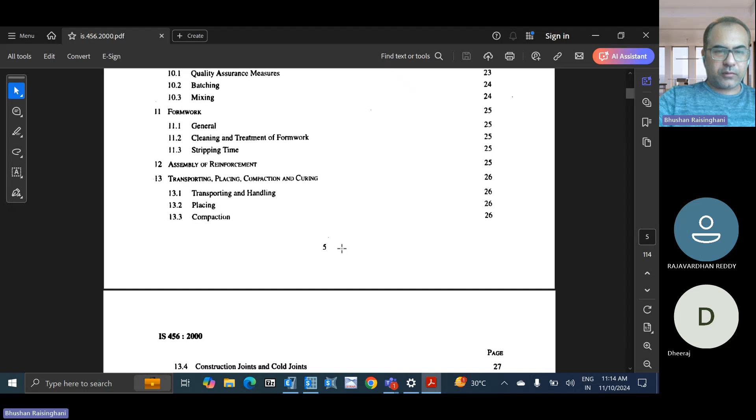Section 24 is for the solid slab, continuous over the support, monolithic, which supports slab spanning in two directions at right angles, and loads on the supporting beams. This is an important section that we have seen.

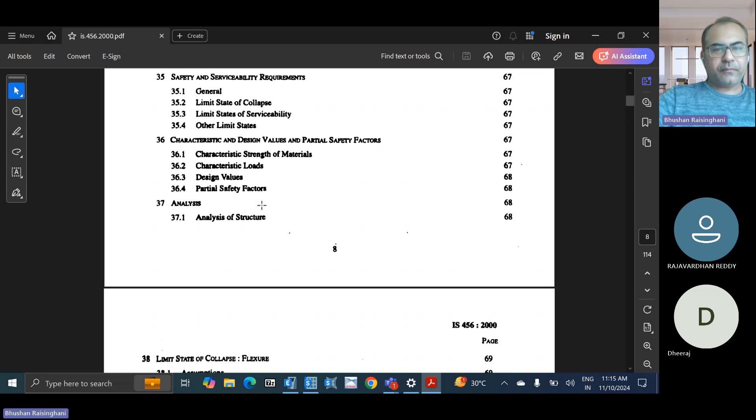I don't think people have queries in the limit state method of design that discusses collapse, serviceability and durability. Three parts are there, and the local checks of cracking, then temperature. So all that reinforcement has to be provided, the cover has to be provided. All those partial safety factors, design values, characteristic loads that we consider for analysis and design remain the same in this particular case.

The only thing is we are comparing the results of the software with the code formulas. So the code uses empirical formulas, whereas the software is using an FEM based routine.

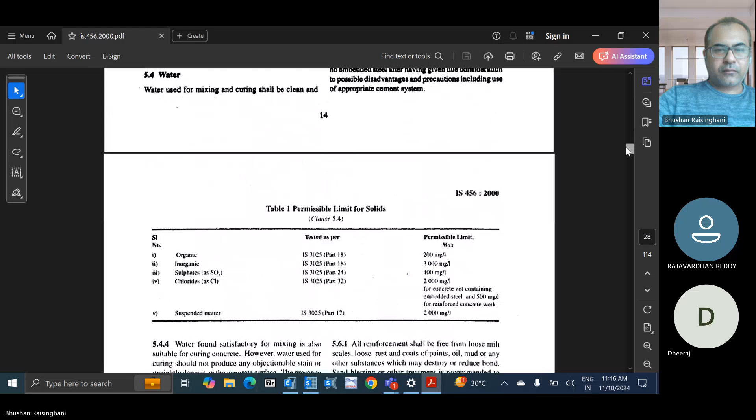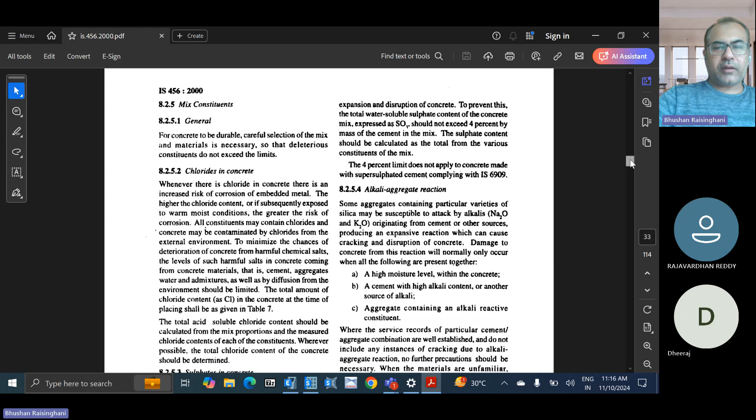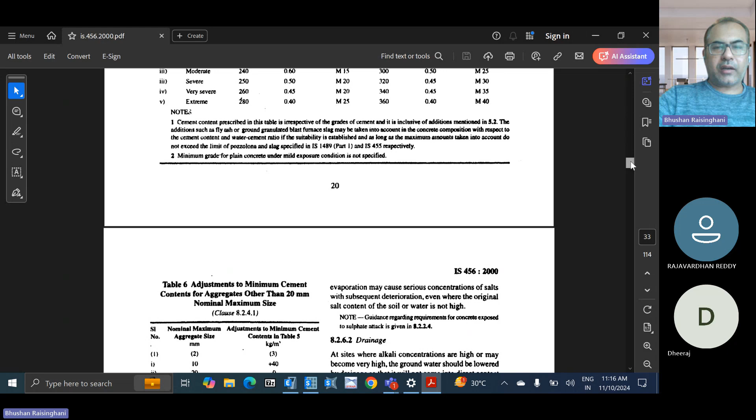So the first thing that we do for any element design as per the IS code is we calculate the effective length. Now for a continuous slab having, let's say, 4 or 5 spans, the effective length in X and Y direction can be calculated center to center of the support, or clear span plus effective depth on both sides. Whichever is less, you take that as the effective length, in both directions you calculate it, so LX and LY, if it is a two-way slab.

If it is a one-way slab, then you have to consider only one direction. The bending is always in the shorter direction, so you consider the shorter direction for the bending moment. Higher bending moment will be there, so the bottom reinforcement will be higher, and it will be at the lower position in that particular direction while detailing it.

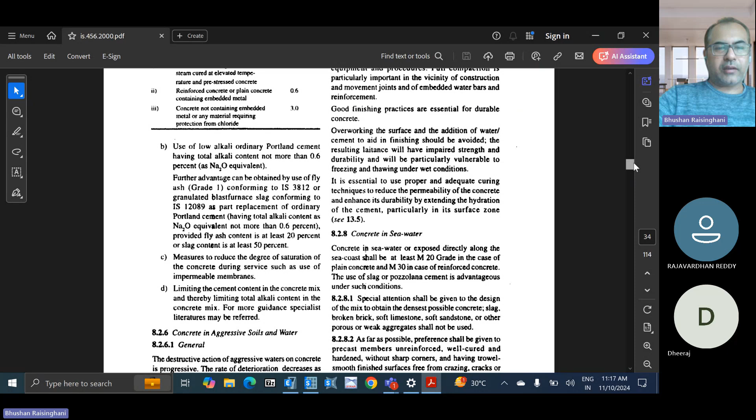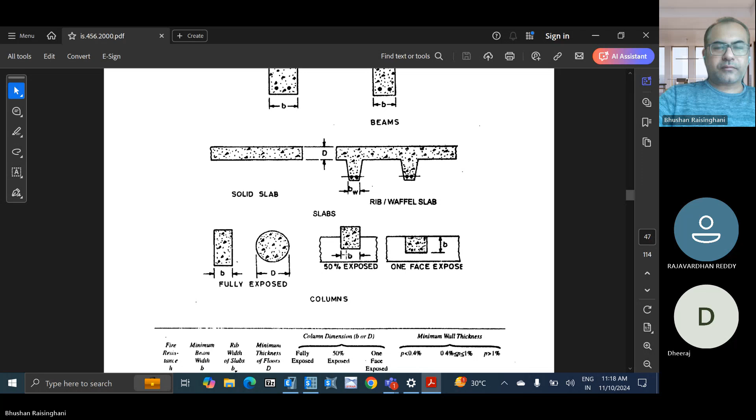So this classification is for rib slabs, these are the ribbed ones or the waffle slab, and this is the solid slab. Two types of arrangements are there, and you can see the same in the software also. One is the waffle or rib slab, and the solid slab. Software is also giving two options for design.

Now this is important, table number 12 and table number 13 if we are designing as per the IS code. I can annotate, and if you are able to see, let me know. Are you able to see the red line?

No. Now can you see? Yes. Okay, let me redraw. So now you are able to see the red line I have drawn. Okay.

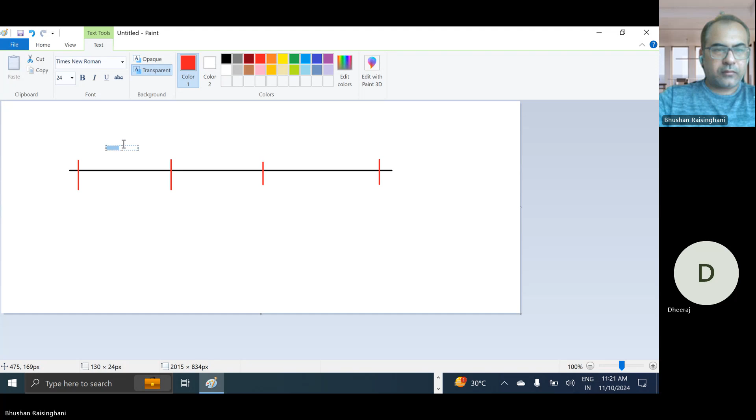So I'm drawing a continuous span of the slabs. This is a three span, let's say two-way slab or a one-way slab, whatever the case may be, and its length maybe 5 meters, then 6 meters, and this may be 7 meters. Dead load and live load is applied here - dead load plus live load. This is a gravity case we are considering right now. So the total load that will come here would be self weight of the slab and the floor finish. So dead load will come as self weight of the slab plus the floor finish.

Just hold on, some noise is coming in back.

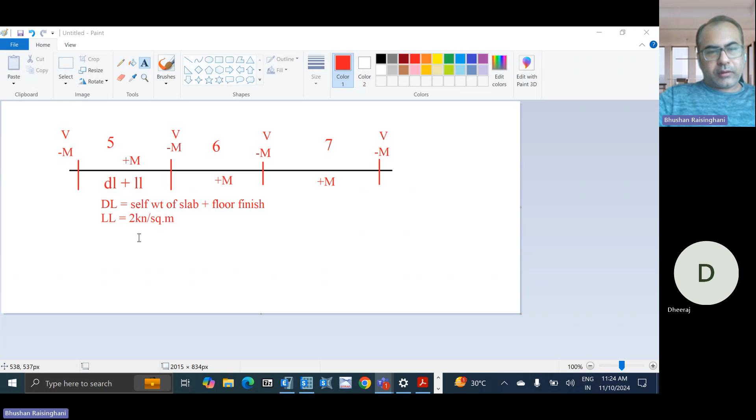Now, if we are calculating the bending moment, we require WU, that is with factor of safety 1.5 times dead load plus live load if we are doing the gravity case. So this is how we calculate WU. From that we calculate the ultimate moment, which is the factor - it may be alpha X or alpha Y based on the code - into 456 into WU, WU in the sense in kilonewton per meter square, that's why I'm writing like small wu, and L effective the whole square.

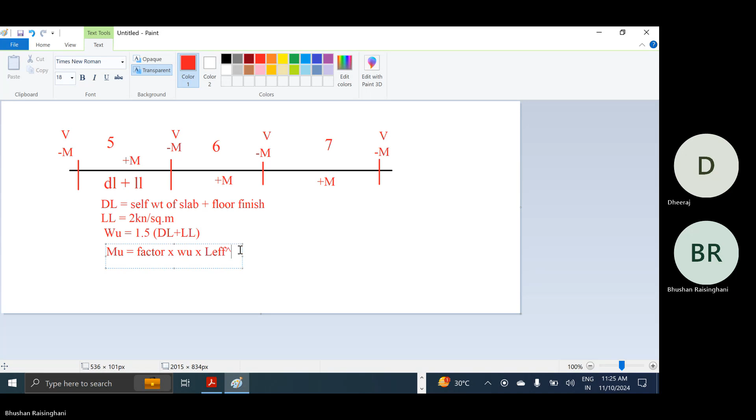I hope whatever I have written is clear and you are able to follow up to this point. Yes. And these factors that we are seeing here, that is for the moment what we have to consider.

One is table 12, in which you get the bending moment coefficient. Other is table 13, which is shear force coefficient. So M and V are to be calculated. Now at near the middle of the end span and at support next to the end support, at other interior support - so these are support moments and these are span moments, the basic difference between the two. The span moments are always in the center, they are always positive, so all values are positive. At the support, all values are negative - negative bending moment will generate.

And these plus 1 by 12 and plus 1 by 16 will be like in our particular case - this is the end span, so it will be plus 1 by 12. At interior, it will be plus 1 by 16. And again, it is plus 1 by 12. So this way, we take the bending moment coefficient for the center span, which is the positive moment calculation.

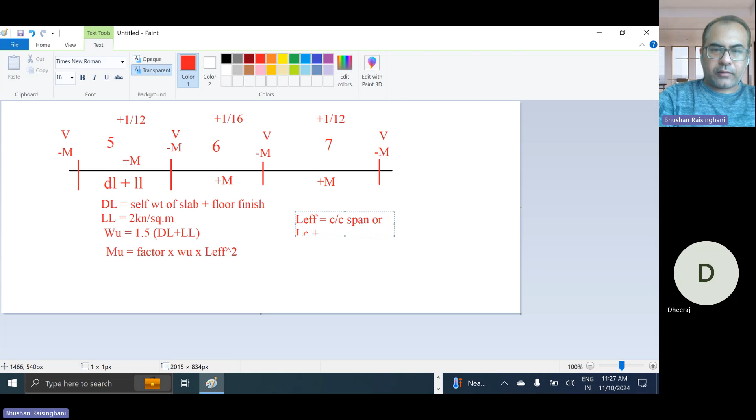Now you can do from here once you do the effective length calculation. So L effective is equals to center span plus effective depth on both sides you have to take - effective depth of the beam that you have considered. Or it will be, sorry, not center to center - either it is center to center span or it is a clear span plus effective depth on both sides. So you have to calculate in both directions X and Y to use it for design for two-way slab. If it is one way, then you have to consider only one direction of L effective. So this is the basic procedure that we follow as per IS 456 2000 if we want to design it.

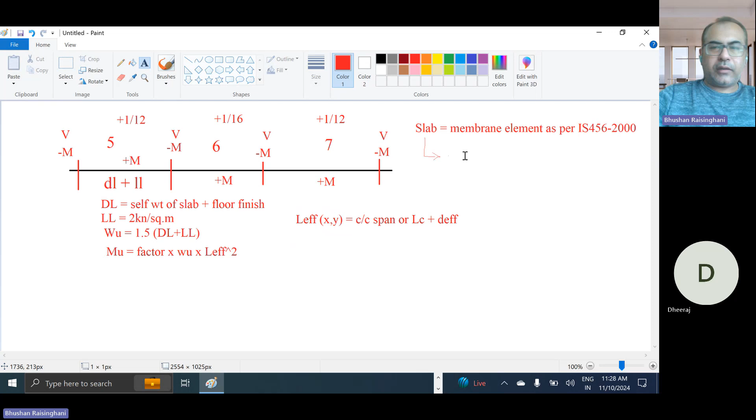And the major difference is we consider the slab as a membrane element as per IS 456 2000. Now, what happens when the slab becomes a membrane, as we had seen last time, is that if it is a membrane element, then it has only axial forces. So axial force is considered only - no flexure or shear is considered in the slab. So what theory follows? Kirchhoff's classical plate bending theory. So this is what we actually do, how we do it in the IS 456 2000. We calculate the bending moment and the shear values using table 12, table 13. What is now required is the modification factor, because L effective is dependent upon the modification factor.

We calculate it and multiply it with the span so that based on the reinforcement you will get what modification factor to take. If the span is more than 5 meter, you can see the two spans are more than 5 meter, then also you have to apply modification factor. And AST required upon provided, you can take one right now in the beginning, and once it is available you can recheck it how much difference is coming, and this parameter is critical once we are designing as per IS 456 2000.

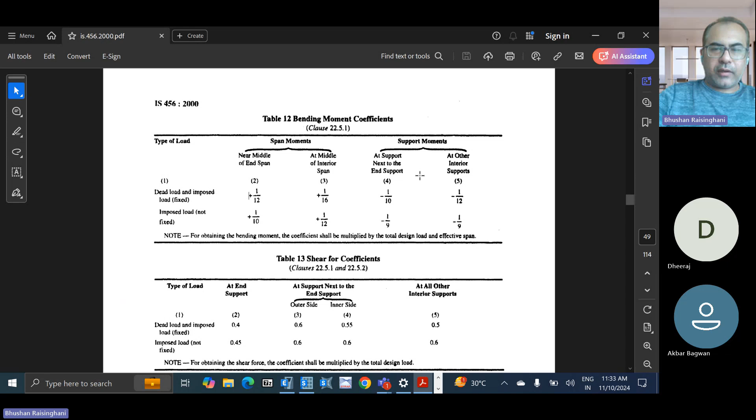So at support next to the end support, at other interior support, two options are there. Now this is next to the end support, that's why I have kept minus 1 by 10. So what about this case? Whether it is minus 1 by 12 or minus 1 by 10, what factor should I keep here? Again, 1 by 10. So minus 1 by 10 and minus 1 by 10, this is for dead load. And for live load, it is minus 1 by 9, minus 1 by 9.

This again, I will write as dead load and this is live load. So negative moments, positive moments for dead load, live load, you will calculate, and based on the effective length and the weight calculation, you will apply the factor alpha from these values. And another value is related to what type of load - let's see when to use table 12 and 13.

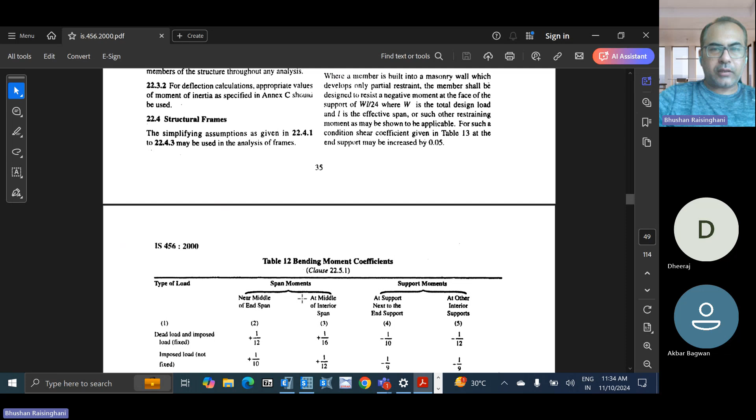So moment and shear coefficient for continuous beams. This is for the continuous beams we are considering. So whatever we have done is for continuous beams, and these moments apply to continuous beams. Now, unless more exact values are done, for beams of uniform cross section which support substantially uniform distributed loads, for UDL type of loads over three or more spans - it has to be minimum three spans and higher - which do not differ by more than 15%.

So the difference in the span should not be more than 15%. So 5, 6, and 7 - I have marked it here. So that should not be more than 15% difference in the continuous span of the longest one. The bending moments and shear forces used in design may be obtained using the coefficients in table 12 and 13 respectively. So for beam moments, for continuous beams of three or more spans with UDL loads, you can get values using table 12 and 13 of IS 456 until more exact estimates are made.

So what the code has written, you can also make more exact estimates. This line is critical - until we are not able to get more exact values, we should use these values. So when we are doing manual calculation, we have to follow these rigidly. Now, if I am using FEM software and if the moment and shear values are changing, should I be taking those or not? That would be the question, because in compliance, if you write that you have designed using IS 456 2000, or you are using FEM software, out of the two, which case will you refer for submission of your design? That is a very critical decision you have to take.

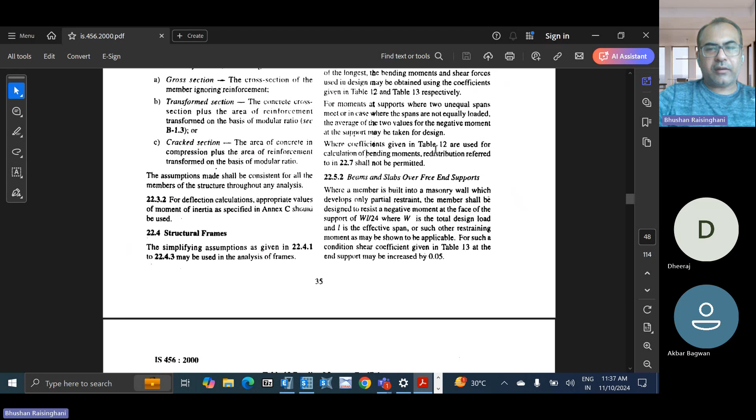So this is for the beams that we have seen. These factors will be for the beams.

Now, shear force coefficient. These were the bending moment coefficients. At the end support it is 0.4, and 0.45 at the support next to the end support, outer side and inner side. For dead load it is slightly different, 0.6, 0.55, and at other interior supports it is 0.5 and 0.6. That factor needs to be applied again. Like I've written for bending moment, the shear force coefficients come the same way. So here it will be 0.4 at the end support and 0.45.

Dead load, live load factors, and 0.6 and 0.55. So here if we see for the shear it will be 0.55 here, and it will be 0.6 here.

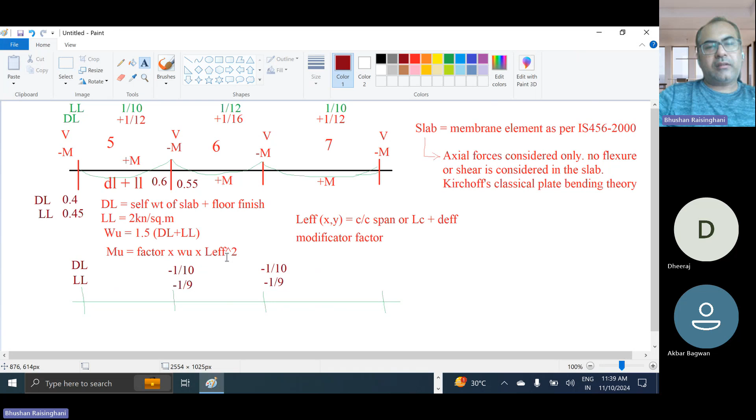Inside and outside, the same will apply on this side. It is the same on both sides. This is dead load, and this is live load shear force coefficient. This way we will get our analysis results from the values that have been mentioned for the beams.

Now we will go towards the slab. So this is the modification factor that we use for beams. The same we are using for the slabs also.

Now we come to the solid slab. For two-way slabs of shorter span up to 3.5 meters with mild steel reinforcement, the span to overall depth ratio given below may generally be assumed to satisfy vertical deflection limits for loading up to 3 kilonewton per meter square. For high strength steel you multiply by 0.8, but critically up to 3.5 meters. We generally have spans of more than that in our design. So if it is a two-way slab and it is up to 3.5 meters, then these values hold good.

Otherwise, these values don't hold good. So why am I specifying all these things? Because it is very mandatory to do the compliance of the codes. So what IS456 has written versus what you are actually doing for your projects, all should be complied. Direct blind copy paste would not serve. You should remember what are the boundary limits in which the code can be applied, and if it is not within the code boundary, then how to do it. That is the reason I am going through the IS456 2000 code.

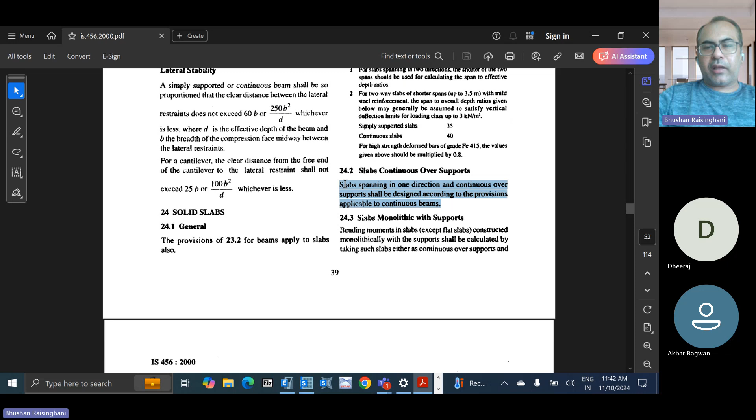Now, slabs that are continuous over the supports in one direction and continuous over the supports shall be designed according to the provisions applicable to continuous beams. That's why I showed you the beam table before, because for continuous slab and for one-way or two-way slab that are continuous over the supports, they are to be designed considering the factors given in the beam section, table 12 and table 13. Now, slabs that are monolithic with supports.

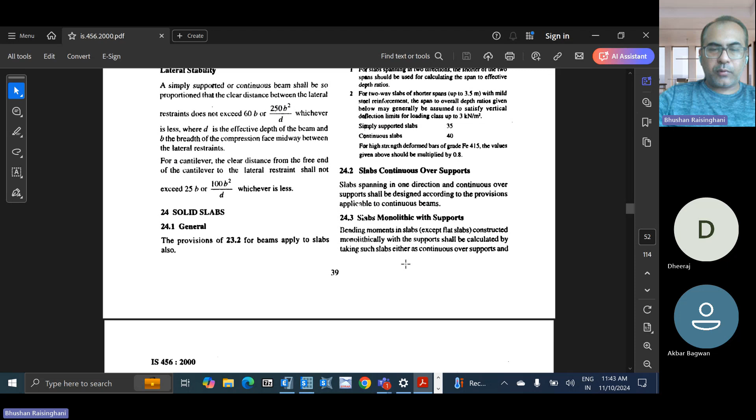Bending moments in slabs, except the flat slab constructed monolithically with the supports, shall be calculated by taking such slabs either as continuous over supports and capable of free rotation, or as members of a continuous framework with the supports, taking into account the stiffness of each support.

If such supports are formed due to beams which justify fixity at the support of the slab, the effect on the supporting beam—such as bending of the web in the transverse direction and torsion in the longitudinal direction—wherever applicable, shall be considered in the design of the beam. So whatever forces are transferred from the slab to the beam, whether generating torsion or bending in the web, all should be considered for slabs that are monolithic with supports. Now, continuous over the supports versus monolithic with supports—these are related to the end bay, where the span is ending, so your slab will be monolithic with the support, and in the interior the slab will be over the support.

So two cases are represented by the IS code, and this has to be followed. In the end span, mostly the beams fail in torsion, and many people release that torsion just by assuming there will be no torsion, or do other workarounds. But it is clearly mentioned that whatever forces are generated by the connection of the slab with the beam, which is monolithic with the support, it has to take that twist and that bending in the web. Whatever is generated, all should be considered. This is very critical, and people don't follow this clause properly.

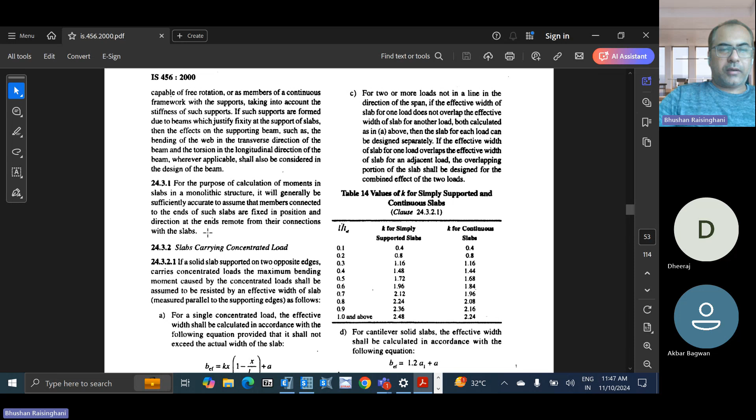So this is not that critical a thing.

It's important that for slabs spanning in two directions at right angles, we have Annexure D, in which coefficients are given, or it may be designed using any acceptable theory or by using the coefficients in Annexure D. So what is this acceptable theory? That is very critical—there is the yield line theory, by which you can design the slabs.

For determining the bending moment in slabs spanning in two directions at right angles and carrying concentrated load, any acceptable method adopted by the engineer-in-charge may be used. The most commonly used elastic methods are based on Pigeaud or Westergaard theory, and the most commonly used limit state of collapse method is based on Johansen's yield line theory—refer to any good textbook for details. That is how the analysis or design of the slab has to be carried out.

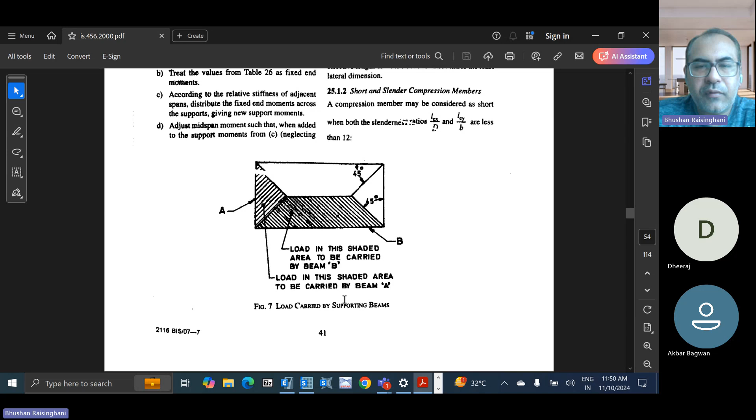So previously, what I had written on the white screen was some W into L square into alpha x or alpha y, that is the moment generated on the beam. Now as per this diagram, there is some distribution in trapezoidal and triangular manner in the two-way slab, not in one-way slab. In two-way slab, this is how it will distribute the load. So you calculate that load, and then you can use it for design.

So this is how the Wu is to be calculated for the two-way slabs, trapezoidal and triangular. The intensity is the same; only the distribution of force in two different directions is separate. So that is for the solid slabs.

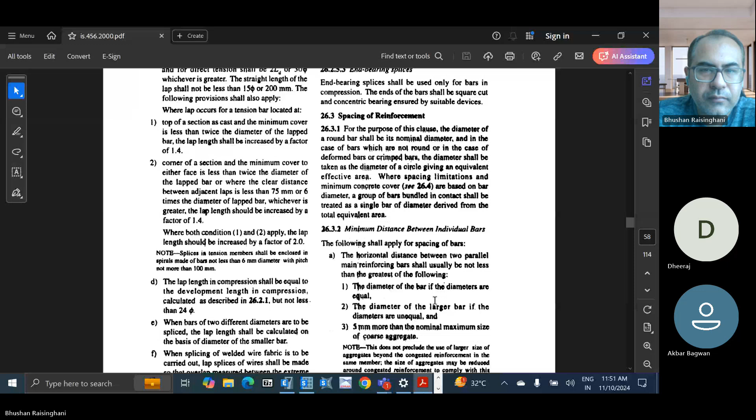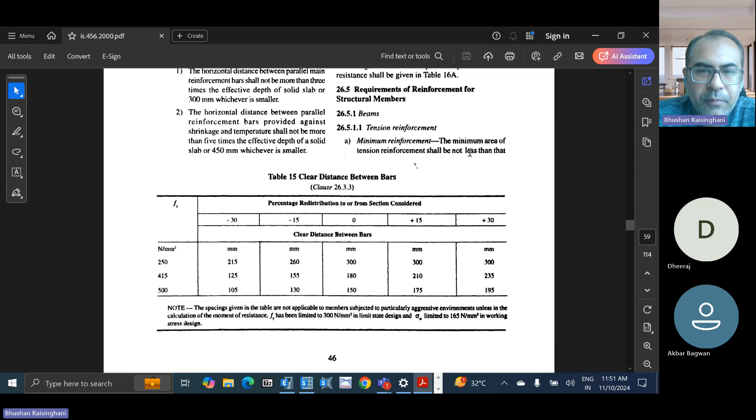So minimum reinforced area of the tension reinforcement shall not be less than given in the following, for side faces of the beams. But you can see here that redistribution reinforcement, if it is Fe415, percentage redistribution to or from the section considered, that way it is to be considered. Temperature steel has to be provided at 450 center to center, not exceeding 450 spacing, as side face reinforcement or reinforcement for the tension, the temperature.

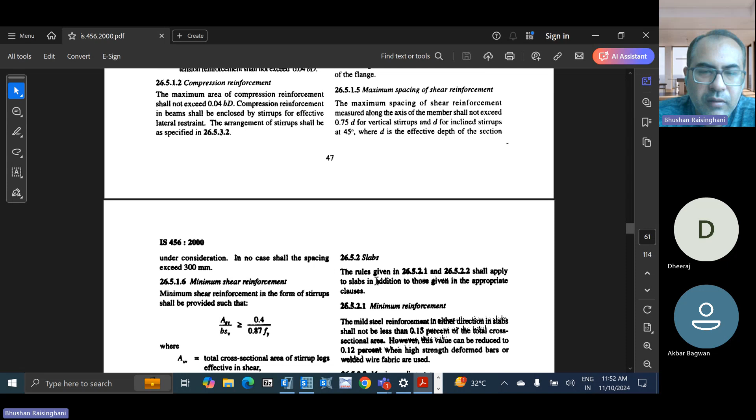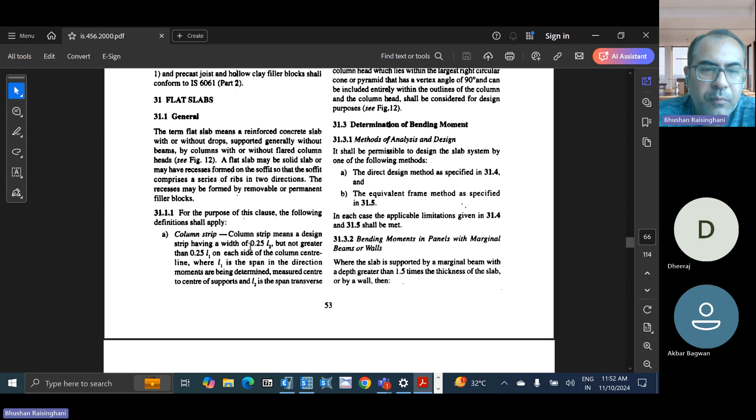I think this is for the flat slabs, and all are clear with this theory that column strip and middle strip is to be taken. Now 0.25 of L1 or 0.25 of L2, that is on both sides of the column. You have to consider a strip which is 0.25 times.

So column strip means a design strip having a width of 0.25 L2 but not greater than 0.25 L1, where L1 is the span in the direction moments are being determined, measured center to center of supports, and L2 is the span transverse to L1, measured center to center of the support. And middle strip is the strip between the two column strips.

And what is called a panel? Panel means the part of the slab bounded on each of its four sides by the center line of a column or center line of adjacent span. So between the center lines, it is a panel. This panel is divided into column strip and middle strip for analysis.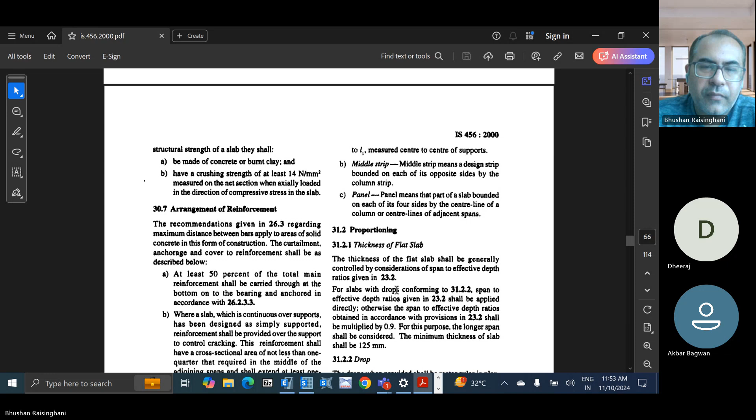Again, the minimum thickness of the flat slab should be 125 mm as per the code, and the L by D effective from the previous section that we saw is also governing here.

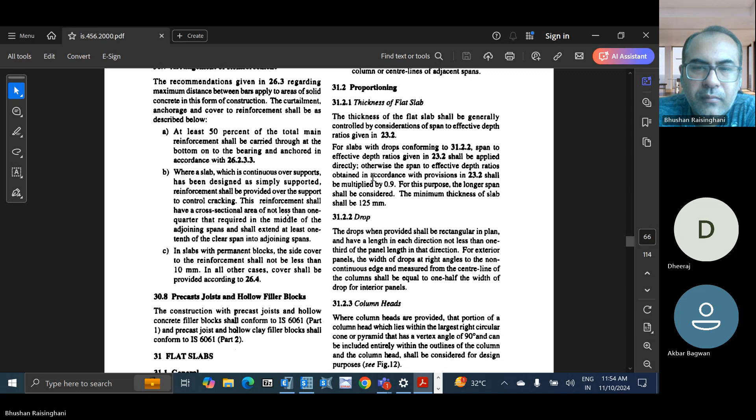Now this is a column drop. If the shear capacity is less and the slab thickness is not able to take the shear, then you have to provide the column drop. Now what should be the size of the column drop? Can anybody explain what is a drop and what is a column head, and in which cases we should provide a drop and a head?

Drop is generally for punching shear. Punching shear and column head. So again, if the drop is not able to satisfy the shear load, then we provide a column head also. It will increase the shear resistance at the joint of the column and the slab.

So the length in each direction: drops are always rectangular in plan and have a length in each direction not less than one third of the panel length in that direction, so it should not be less than L by 3. For exterior panels, with the width of the drops at right angles to the non-continuous edge and measured from center line of the column, shall equal one half the width of the drop for interior panels. So whatever L by 3 you have considered on the interior, half of that has to be provided on the exterior drop panels at the edges, perimeter of the building.

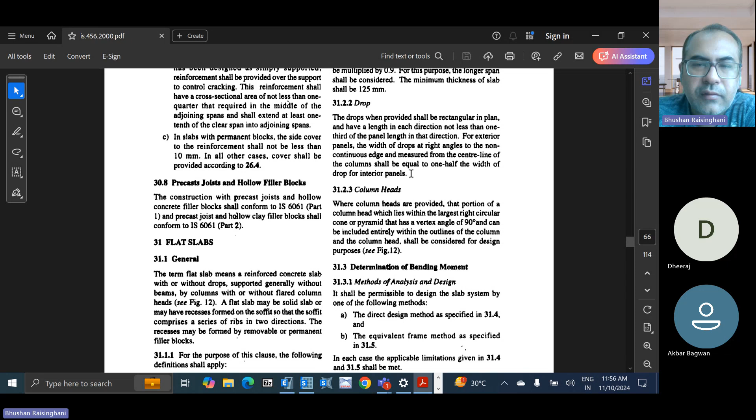So there are two methods of analysis in this. It shall be permissible to design the slab system by one of the following methods: direct design method and equivalent frame method. You can get these, direct design method and equivalent frame method, in the textbooks. I think you would have gone through both the methods. If not, then kindly go through it, and if you have some query, you can ask me on the direct design method and the equivalent frame method.

In each case, the applicable limitations given in 31.4 and 31.5 shall be met. So whichever method of analysis is mentioned below, it should be matching those limitations.

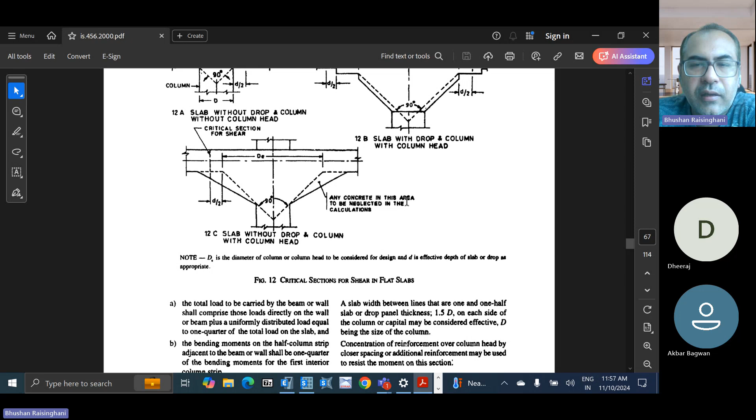So bending moments in panels with marginal beams or walls. Where the slab is supported by a marginal beam with a depth greater than 1.5 times the thickness of the slab, or by a wall, then the total load to be carried by the beam or wall should comprise loads directly on the wall or beam plus a uniformly distributed load equal to one quarter of the load on the slab. So whatever the load is there, divided by 4, plus whatever load is coming on the beam or wall, has to be carried by a beam or wall having a thickness greater than 1.5 times the thickness of the slab, if the beam or wall is provided.

Now, bending moment on the half column strip adjacent to the beam or wall shall be one quarter of the bending moment for the first interior column strip. So whatever is near to the beam, for that column, at the ends, if a beam is provided like a perimeter beam, for that column connecting with the beam, the half column strip loading to be taken is the bending moment divided by 4, one quarter of the bending moment for the first interior column strip.

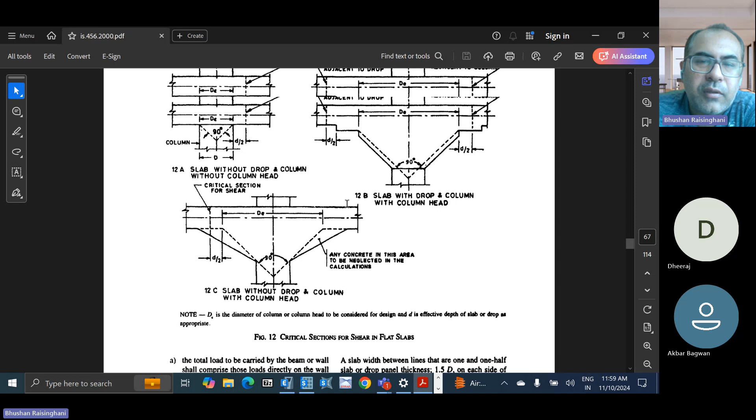So the load taken by the beam or wall, and the load taken by the column - two criteria are there. Whenever a beam is provided along with the panels, mainly at the perimeter, you have to consider this for the beam and for the column that is connected to the beam. So load divided by 4 for the beam and the wall, and moment divided by 4 for the columns. That has to be considered.

So transfer of bending moment to columns: when there is unbalanced gravity load, wind, earthquake, or other lateral loads causing transfer of bending moment between slab and column, the flexural stresses shall be investigated using a fraction alpha of the moment, given by 1 upon 1 plus two-thirds root of a1 upon a2, where a1 and a2 are the overall dimension of the critical section for shear in the direction of the moment and the other direction. That dimension ratio gives you alpha. And a slab width between lines that are 1 and a half times the slab or drop panel thickness, 1.5 D on each side of the column or capital may be considered effective, d being the size of the column.

So a slab width between lines that are 1 and a half times the slab - what does it mean? What is it actually representing? A slab width between lines that are 1 and a half slab, on each side of the column. So this could be the middle strips or the side strips. So it is talking about the slab width, first of all, not the length. So now how much width is to be considered? A slab width between lines - what type of lines is it saying?

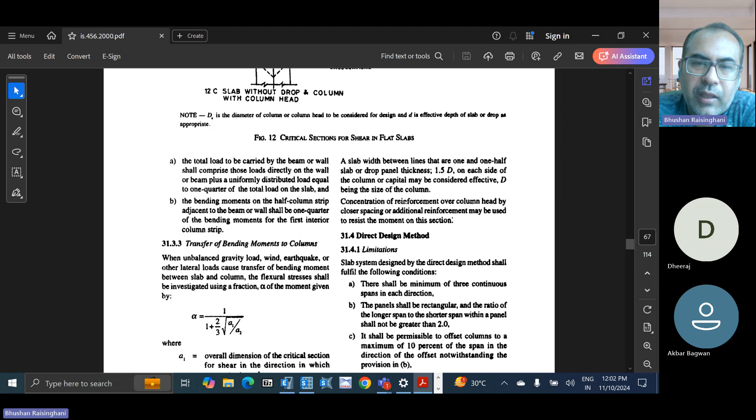So it is talking about how much width to consider for the slab above the column, which has a drop or does not have a drop. So concentration of reinforcement over the column head, by closer spacing or additional reinforcement, may be used to resist the moment on this section. So that is the detailing part that has to be taken into consideration.

So direct design methods, slab system designed by direct method shall fulfill the following conditions. There shall be minimum 3 continuous spans. The panel shall be rectangular.

The ratio of the longer span to shorter span shall not be greater than 2. So if it is not greater than 2, then it is a two-way slab, right? So it has always been the two-way direction. It shall be permissible to offset columns to a maximum of 10% of the span.

So offsetting the column that is away from the center, the CG of the placement of the element above the column, only 10% offset is allowed.

The successive span lengths in each direction shall not differ by more than one-third of the longer span. So same as we had seen, the span should not be more than one-third the longer span. In this case, the method is applicable.

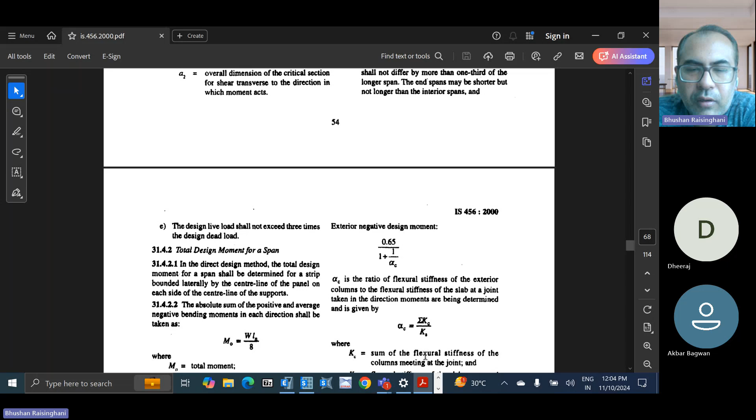The design live load shall not exceed 3 times the design dead load. So the applicable requirement is live load should not exceed 3 times the dead load. This is also a very critical parameter to evaluate.

These results will be useful to you only if you take care of all these limitations given in the code, and those parameters and factors mentioned are applicable within that boundary. Once you go beyond that boundary, the code is not compliant. And if you are not using the given clauses, then also you are not compliant.

In cases where it is applicable, you should take out the worst case, and where it is not applicable, you should carry out the analysis routine or the design routine separately. This is what is mentioned by all the requirements given in the code.

So WL square by 8 is the bending moment, positive bending moment at the span. In the direct design method, the total design moment for a span shall be estimated for a strip bounded laterally by the center line of the panel on each side of the center line of the supports.

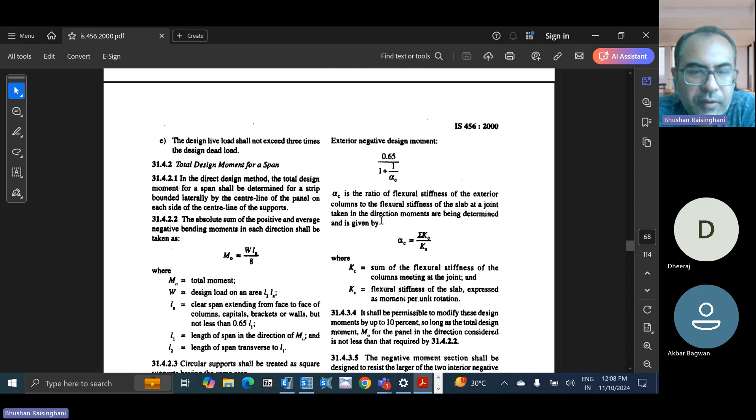And exterior negative design moment on exterior face is 0.65, 1 plus 1 upon alpha c. So you see, on the interior face it is 0.75, here it is 0.65. So it is less on the exterior side, more on the interior side.

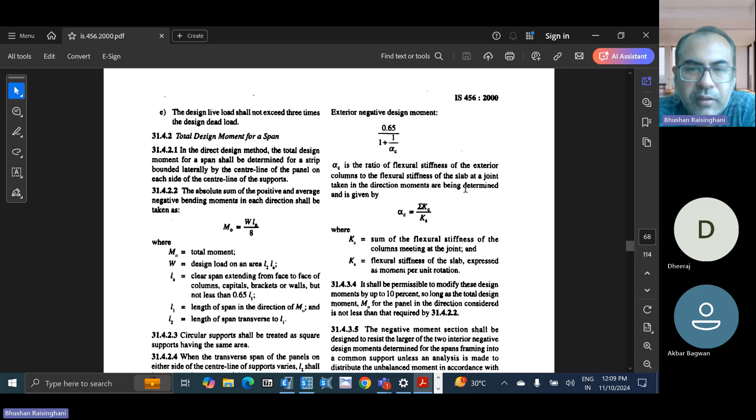Now what is alpha c? It is the flexural stiffness of the exterior columns to the flexural stiffness of the slab at a joint, taken in the direction in which moments are being considered. So sigma Kc upon Ks. This Ks is the flexural stiffness of the slab, EI, and sigma Kc is the sum of the flexural stiffness of the columns meeting at the joint.

So if there is one joint, let's say one interior span is there, how will you calculate sigma Kc? Why is it taken as sigma, the sum of the flexural stiffness of the columns meeting at the joint? If there is one joint, there will be only one column, so how is it saying the number of columns meeting at the joint? What is this sigma Kc basically?

So above the floor and below the floor, the column stiffness you have to consider, and this is the flexural stiffness of the slab. If the beam is provided, that stiffness also has to be considered.

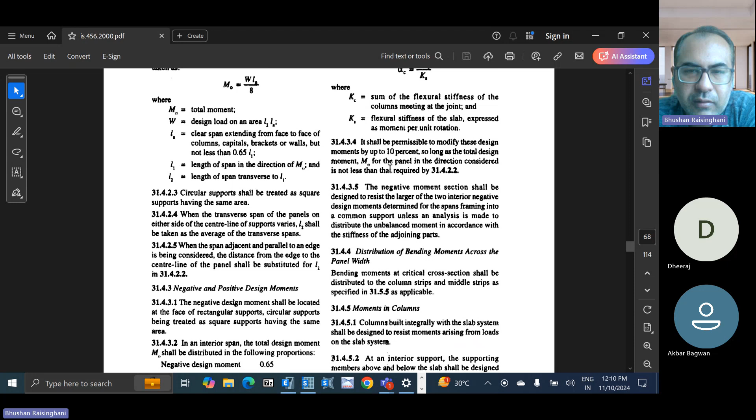It shall be permissible to modify these design moments by up to 10%, so long as the total design moment for the panel in the direction considered is not less than determined. So this is a 10% variation based on the size of the panel.

So this is the column moment that is above and below the slab. As a joint action, both columns will resist this moment, so it has to be designed for that.

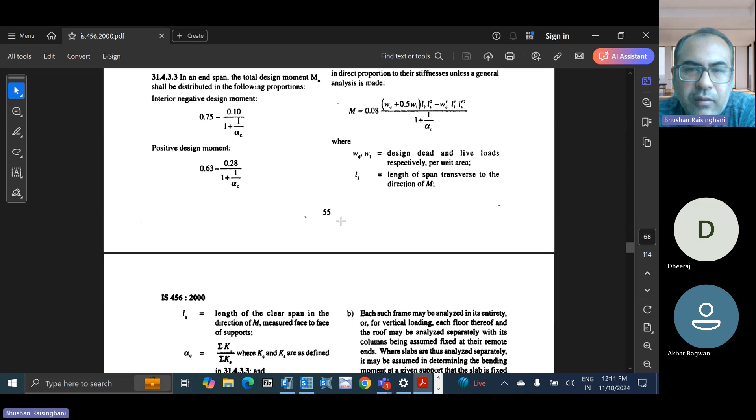Dead load, live load has been considered in this formula. L2 and WD dash are for the shorter span, and WD and WL are for the span being considered on the longer span. So longer and shorter span, both values are there that are considered for calculating the bending moment on the column.

So live load to dead load ratio also has been mentioned, that when the ratio of live load to dead load exceeds 0.5 - like if it is 6 kilonewton per metre square is the live load and your dead load is less, and it is exceeding 0.5, means let's say both are equal, dead load and live load.

So in that particular case, the sum of the flexural stiffness of the column above and below the slab shall be such that alpha c is not less than the appropriate minimum value alpha c minimum specified in table 17. So you have to follow this particular ratio, imposed load upon dead load ratio, first you have to calculate.

Based on that, L2 upon L1 ratio you will make, that is the span of your flat slab in two directions, L2 upon L1 - what is the ratio for that. Based on that, you will get the alpha C minimum. This alpha C minimum you have to put, and you know the stiffness of the slab, and from that you calculate the stiffness of the column required. So the required stiffness of the column has to be estimated if live load upon dead load ratio is exceeding 0.5.

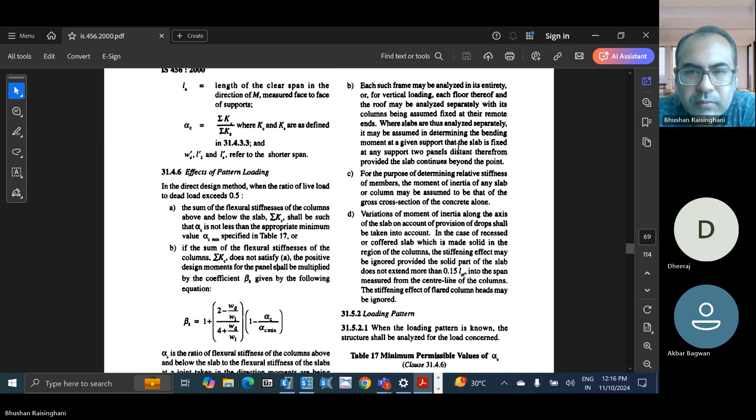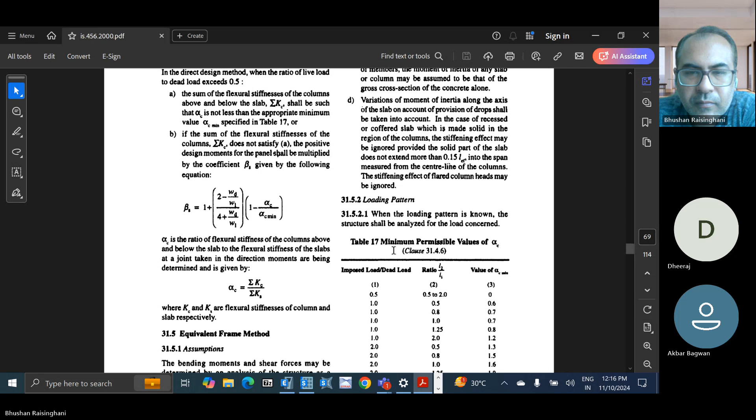All these parameters, rest of the things you can refer, and negative, positive design moments are again to be estimated, like we do it for the direct design method.

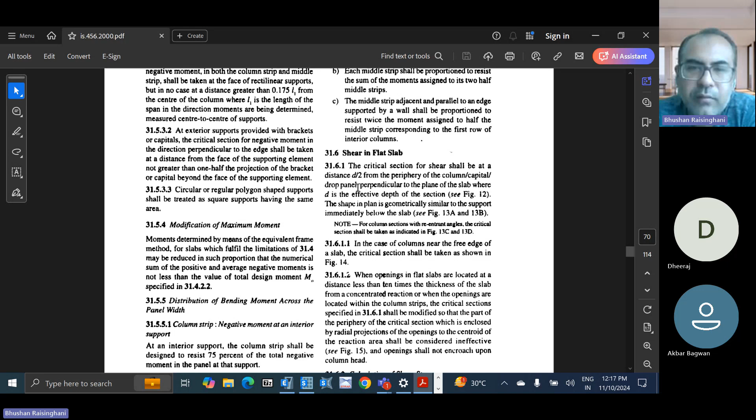Now the shear in flat slab is critical. The critical section for shear should be at a distance d by 2 from the periphery of the column, or capital, or drop panel. So wherever there is a column, d by 2 from there; wherever the capital ends, d by 2 from there; wherever the drop panel ends, d by 2 from there, considering the effective thickness of the slab. You have to consider that region to estimate the shear.

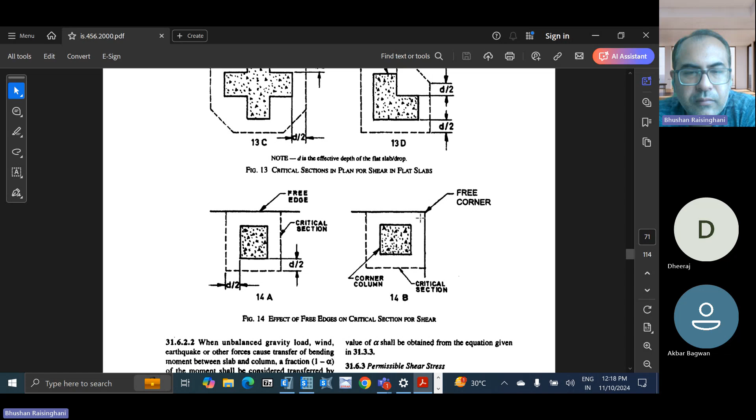You can see this is the consideration, so d by 2 here you have to consider. Now this is your critical section marked like this dotted line. So d by 2 on all sides, on two sides. Here it is on three sides. So here also three sides has been shown d by 2.

And all round in the interior spans. For circle also it is a diameter of d by 2 higher. This way you have to consider for the shear.

When openings in flat slabs are located at a distance less than 10 times the thickness of the slab from a concentrated reaction, or where the openings are located within the column strip, the critical section specified in 31.6.1 shall be modified so that the part of the periphery of the critical section which is enclosed by radial projections of the openings to the centroid of the reaction area shall be considered ineffective, and the opening shall not encroach upon the column head. See figure 15.

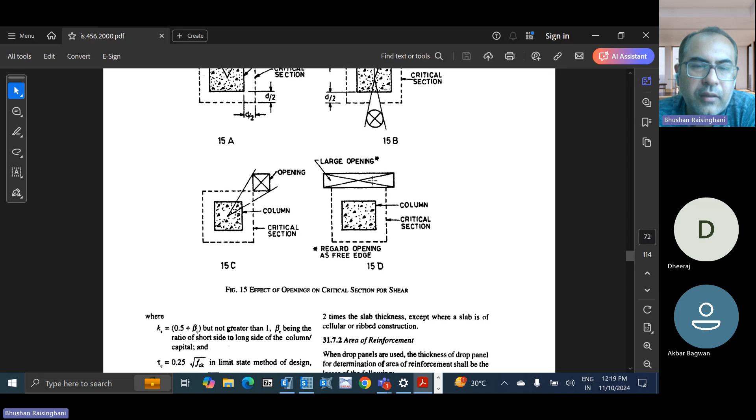So your openings, where to keep it, it should not encroach your strip. Column strip is away, that is okay. Now here also there is the opening, a large opening, and here it is a column critical region. So it should be outside the column critical region. So whatever openings are there, it should not be within the column strip.

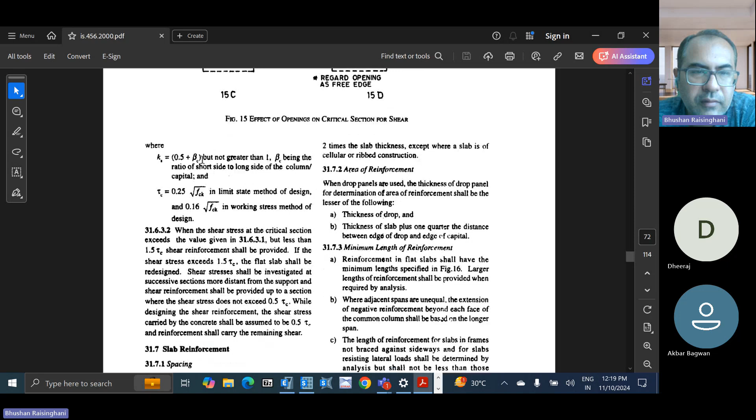So permissible shear stress is Ks into tau c for the flat slab. Ks and tau c are the same as we do it for footings as well.

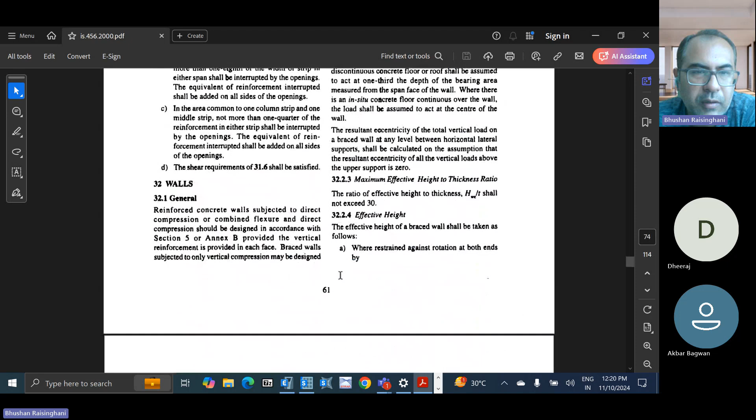So rest all is part of detailing and other requirements - openings, where to keep, where not to keep, how to consider. The last part left out is the annexure.

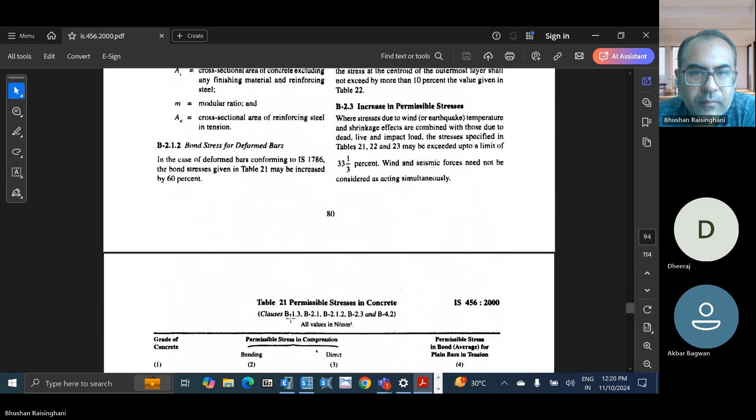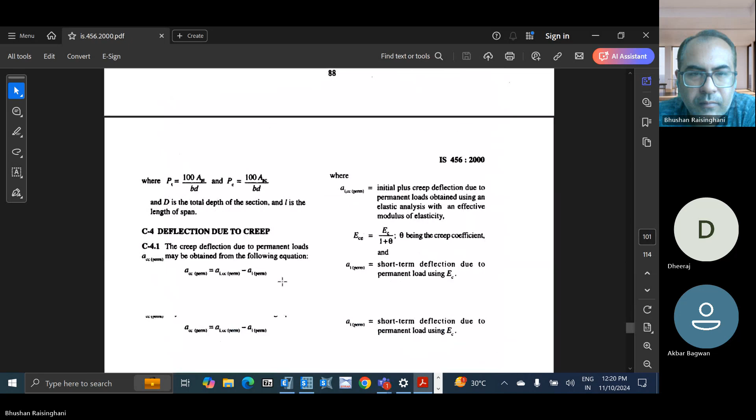So a slab is always divided into middle strip and edge strip. Edge strip will be Lx by... let me see. I think it was Lx and Ly by 8, but I have to check this value. And 3 by 4 and 2 by 4 is 1 by 4. Yeah, it is Ly by 8 and Ly by 8, Lx by 8, Lx by 8. So 3/4 is the middle strip, and your 1/4 is the edge strip. Now 1/4 divided by 2 will be 1 by 8 Ly on two sides. So this is how the longer direction, shorter direction, middle strip and edge strips are to be formed.

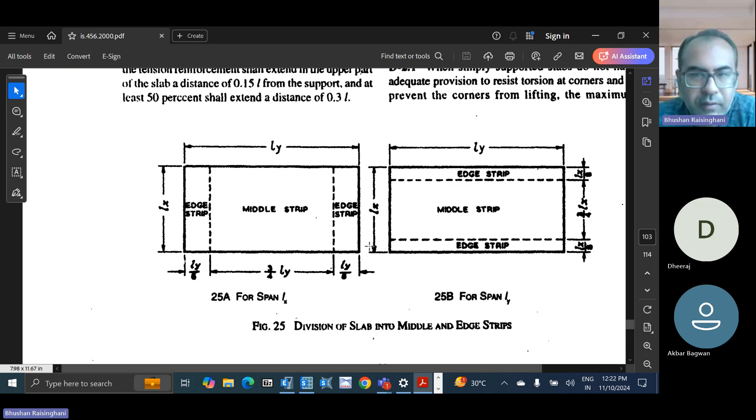And the bending moment is to be calculated for both cases, and your analysis will give you the moment. Mu by bd square, and from SP16 you will get the reinforcement, top reinforcement and bottom reinforcement.

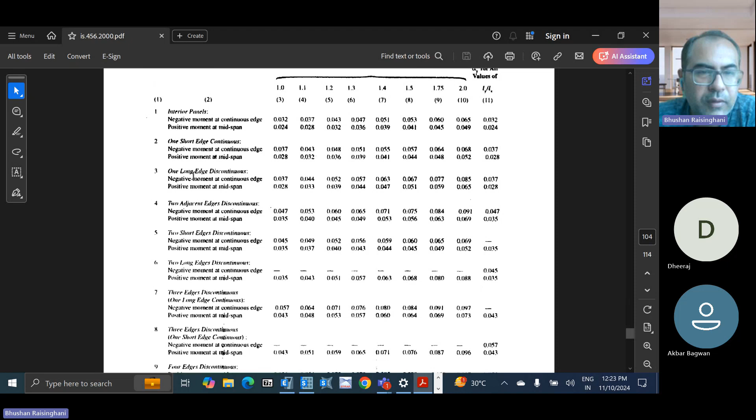Now these are various conditions - rectangular panels supported on four sides with provision for torsion at corners. So interior panels, one short edge continuous, one long edge discontinuous. All those 9 criteria have been mentioned. What criteria is suitable to you, from that you have to consider, but we'll see where it is written - table 26.

So this is for table 27. Table 26.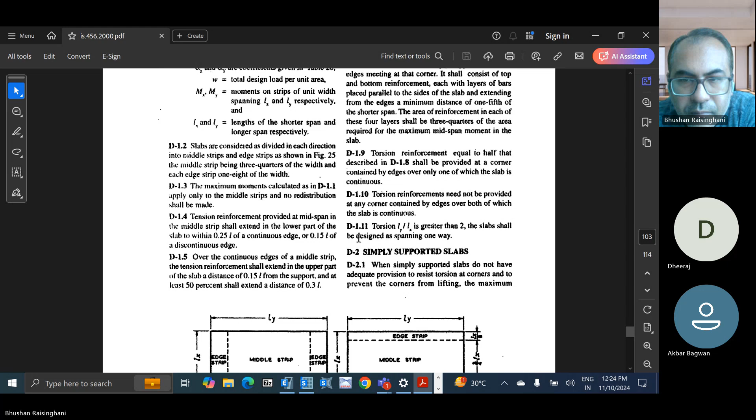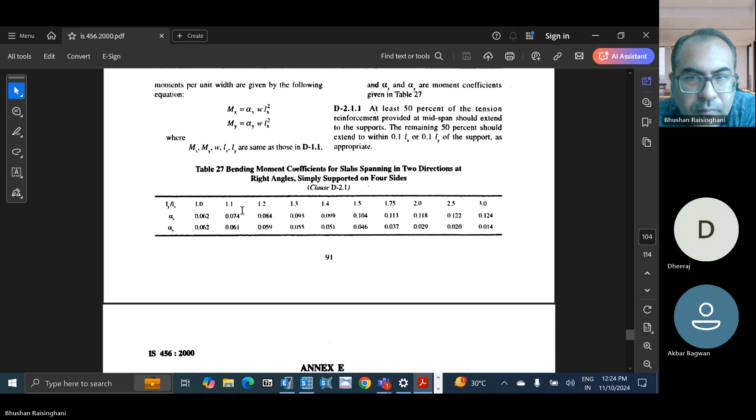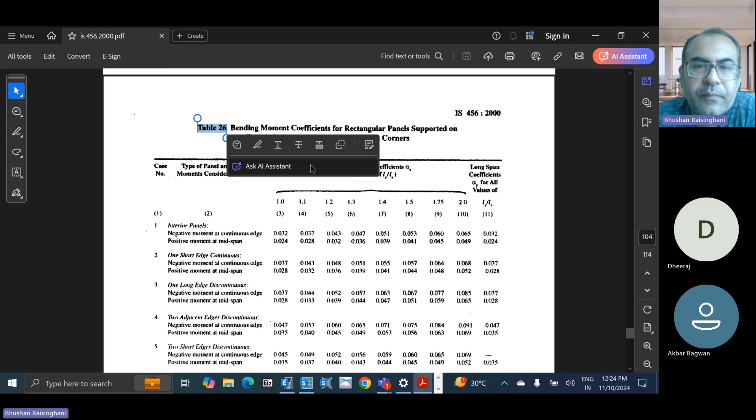For simply supported slabs, we have to refer this table 27. However, for this rectangular panel supported on all four sides, which is not simply supported, you have to follow table 26 for calculating the factors for the moments alpha x and alpha y, which I don't think is mentioned anywhere. So table numbers 25, 27, 26, nowhere can I see it.

So that was on IS456, all these criterias have been covered for beams. So two things are to be designed: one is the slab and the beams. And for flat slab, it is the slabs, beams, and the columns. All these are in a very detailed manner. The assumptions are given in the methods of analysis and design followed by IS 456. If you want to comply with 456, you have to follow all these constraints. And whatever is beyond this code clauses, you have to consider it in analysis, design, and prove it and check for the worst case.

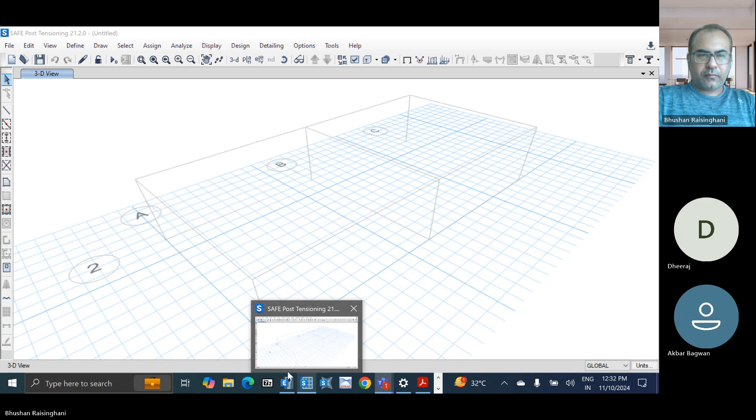So I open ETABS right now, trying to make the same model that I had drawn. So there are options called flat slab without the perimeter beam, then flat slab with perimeter beam, then this is the ribbed slab, then two-way or the ribbed slab. So that way you will directly get this option. Right now I am taking the grid lines.

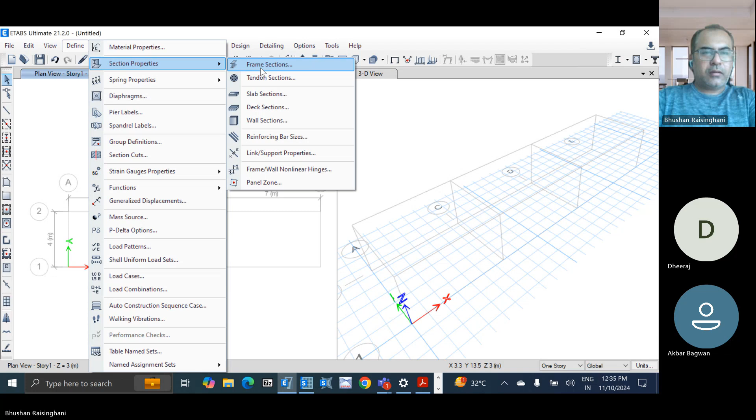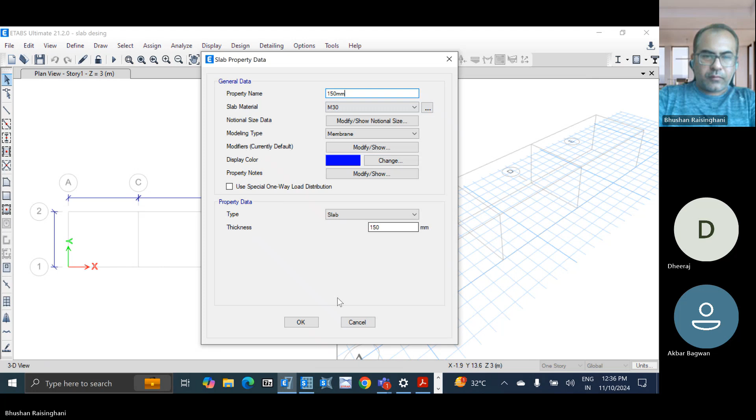Issue is there, so we'll first define the slabs. So it is a 150 slab that I am considering. It is M30 grade, and right now I'll take the membrane, and I will consider either as one way or two way, whatever I want. Right now considering two way, so 150, and I'll apply it here, 150. So right now there are no beams modeled.

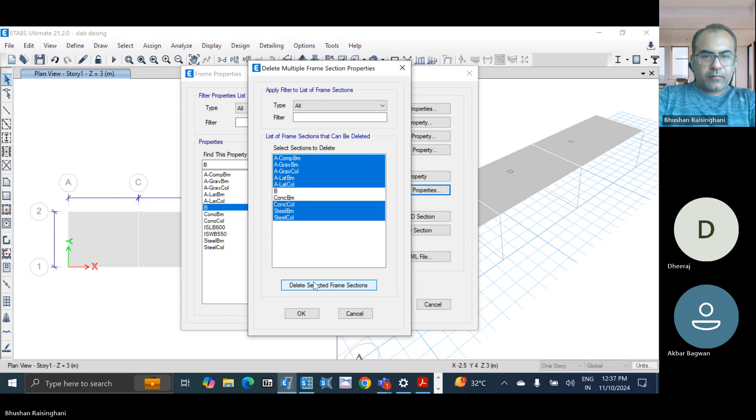So I'll add the beams also. Okay, so beams and slabs are modeled. I'll just take the supports, or let me draw the model, otherwise the beam moments will not come into picture. I'll define the column as well.

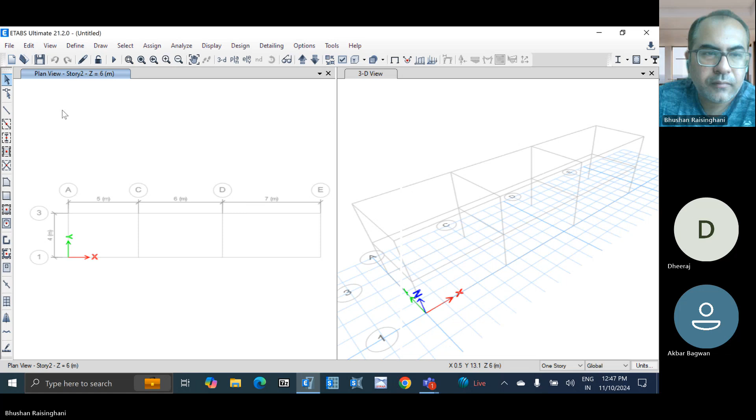So what is the benefit of the software is that you can also do the composite design in this particular thing, which does not have a valid Excel sheet. So in those particular cases, composite slabs, decks, you will...